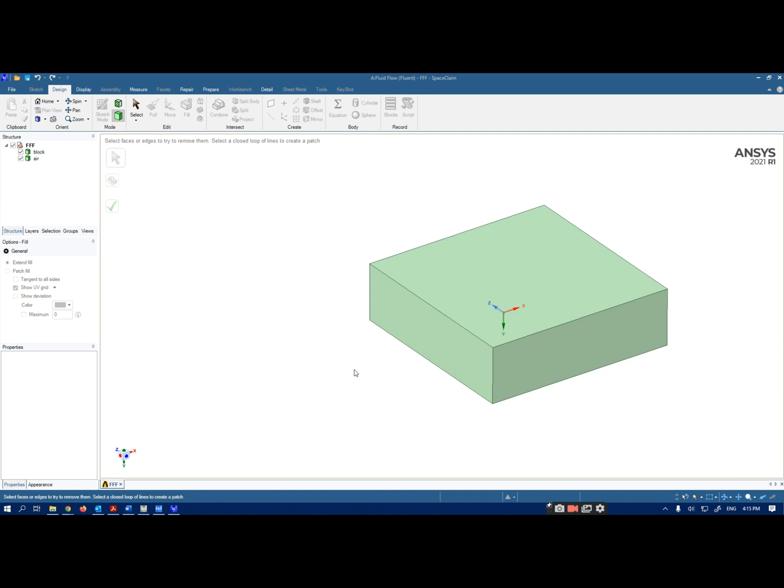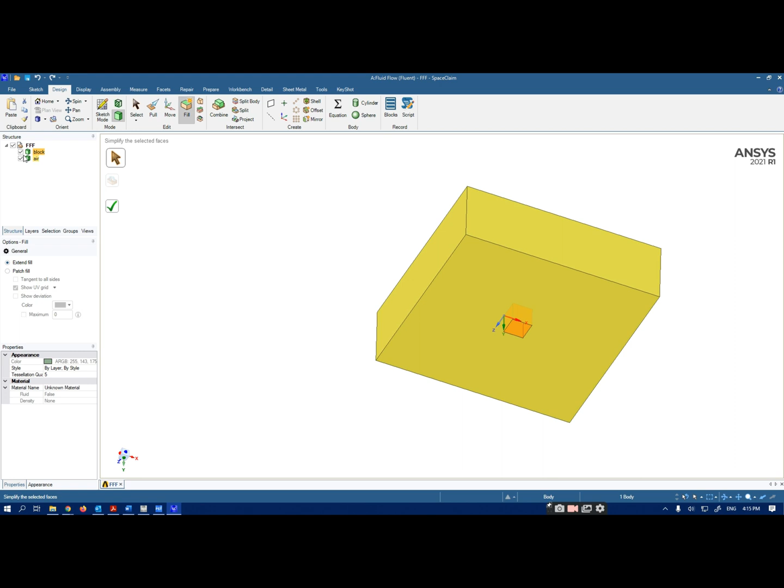For this simulation, because it's just a showcase, I drew this larger box, which is going to be our air domain, and a small block, this cube inside that, is going to be our cube inside this air domain. It is going to simulate something like a flow inside an internal channel. So if I remove my block, you're going to see we have that sharing contact between the air and block. So everything is good, no problem.

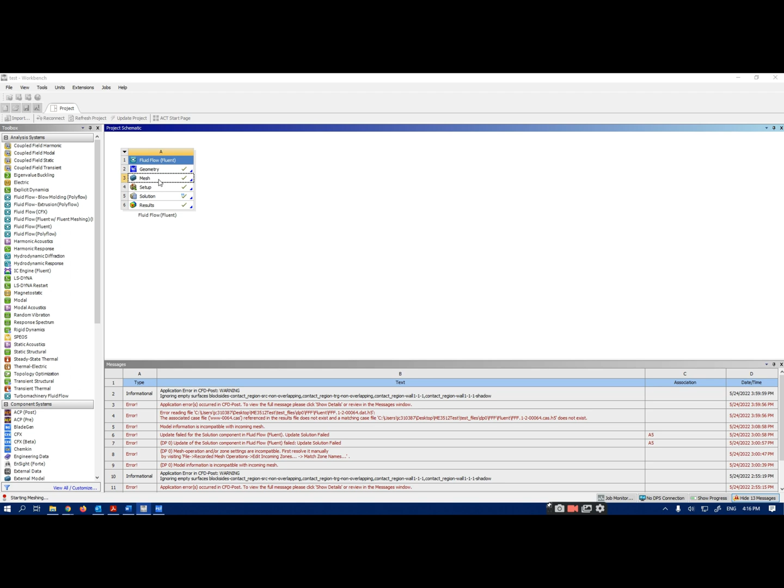Let me show you a few details of what I've done, so it will be useful later. Okay, let's go back to our mesh. Let me show you the namings we have so we can have a better understanding of the geometry.

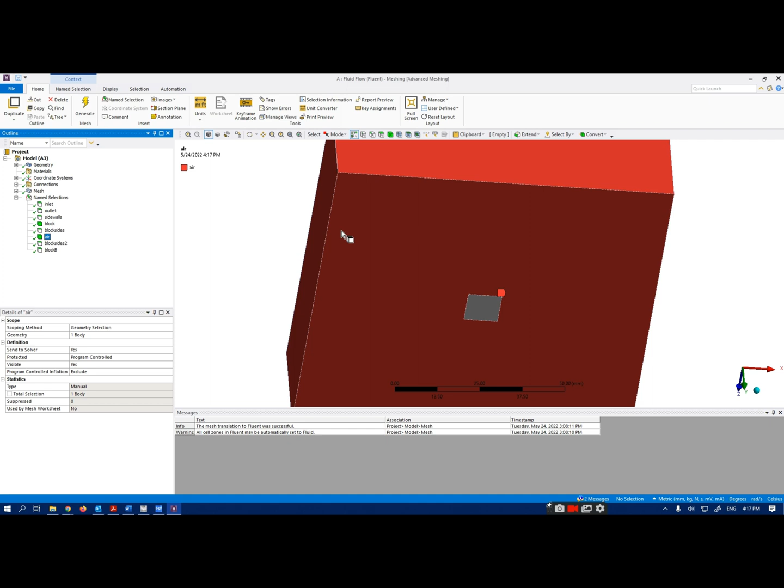Okay, I named this side as an inlet, the other side outlet. These three and the lower part are going to be our walls, the side walls, so nothing important is going to happen there. And I named the block there, air there, and the bottom surface of the block as block B, to assign some temperature if I want later, and the contact between block and air, I put the name.

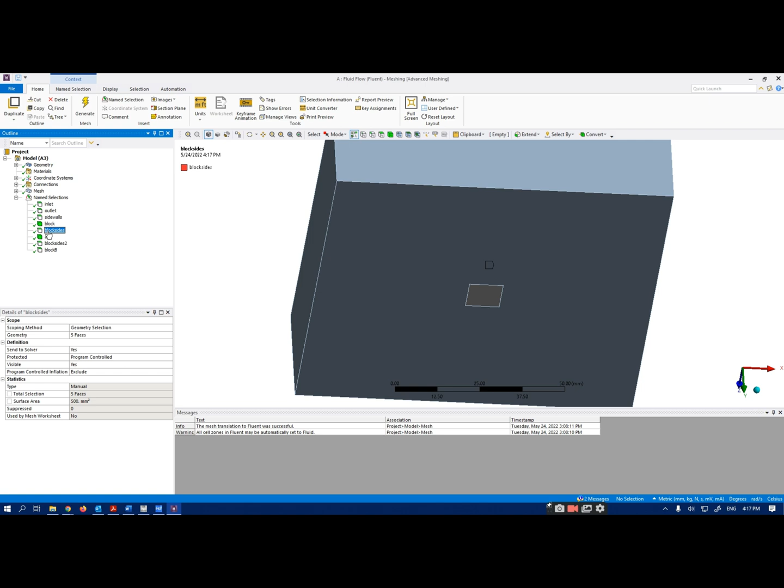One of them from the air side, I made it block side 2. From the block side, it's block side. Let me, for example, hide the block so you can see what I mean. This is the surface I selected because it is going to be the surface of the block inside that air. So later, if I need any information about that, I already named it.

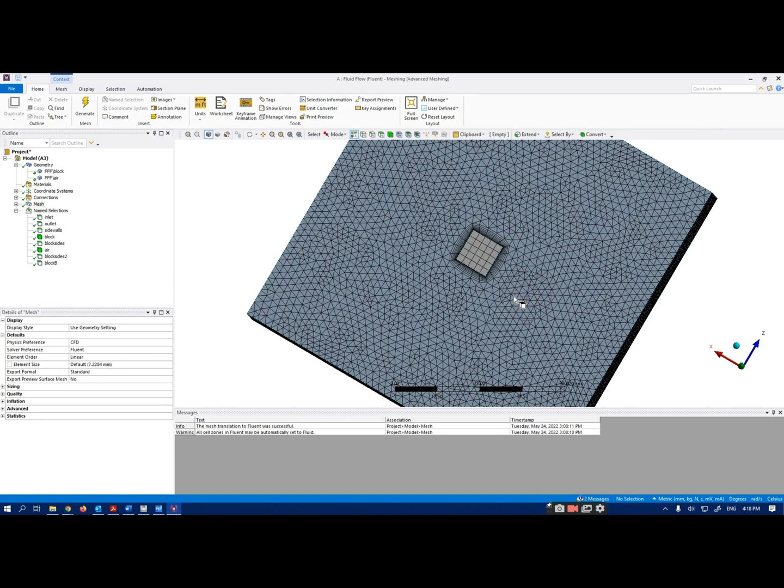Okay, so I put just a general mesh. As you can see here, I have some inflation around the block because close to the wall we usually need more information. This is a rough mesh, I didn't go for high quality mesh. This is just the showcase, but I wanted to show you whenever there is a wall and it is important for me, I need to have inflation.

Okay good, now let's go and I assigned, okay let me open this. I assigned air for the fluid and aluminum for the block. So very simple materials, basically those are the default materials for ANSYS Fluent.

Okay, almost there. So you can see it's pressure-based, transient. I included gravity, but of course gravity is not that much important. The model I considered is SST K-omega, because I decided to go with a velocity of, I don't know, 10 or 15 meters per second, so probably it would be turbulent flow inside this channel. Energy is on because I want to have temperature effect. Fluid is air and solid is going to be aluminum.

Cell condition for the air part is fluid and it's air. For the block part it's solid and it is aluminum. Boundary conditions, you can see inlet is inlet, so I already named them, so it is easy to check. So it is 10 meters per second for the inlet and the temperature is 25. And outlet is pressure outlet.

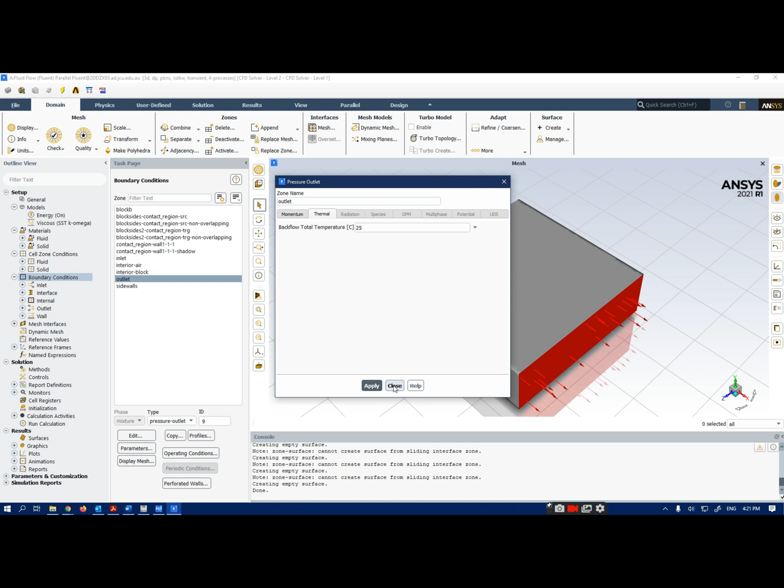As you know, the pressure outlet is the easiest boundary condition. Basically you make the pressure outside 0, gauge pressure would be 0, and again the temperature is going to be 25. So many students usually forget about this, and then you can see in their simulation they have hot fluid coming from outside, which is because they haven't assigned the initial or room temperature when they are assigning their boundary conditions. Anyway, and for the side walls it's wall.

Then you need to make sure your interface is okay. You go to the contact region, edit, and when you select this, you should couple the walls, the contact between the block inside and the air around it. We must have thermally coupled walls to be able to have heat transfer from the block to the air and have that cooling effect happening there.

And nothing else, I kept everything as default. The method is this, nothing changed here.

And I saved some data, as you can see here. Let me show you from the top: pressure, velocity XYZ, and temperature, wall temperature, Y plus, and kinetic energy, density, dissipation, turbulent intensity, wall Y plus in case I need it, wall shear stress, and surface heat transfer coefficient. If I want to calculate the Nusselt number, I need to know what is H at the surface.

So this is good, handy. You can have total surface heat flux, skin friction in case you need it for other calculations, and you can have heat transfer coefficient with different formulas, for example if you're using wall function, you can have wall function heat transfer coefficient. You can also have surface Nusselt number.

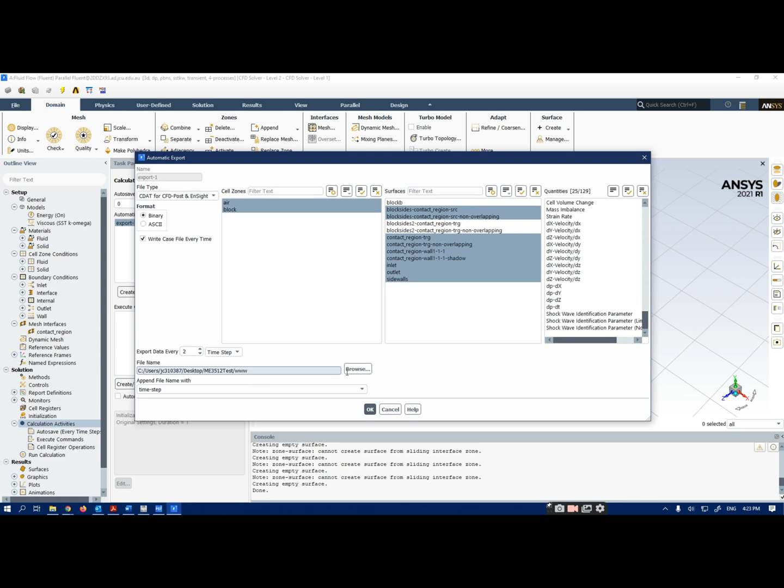So I included a few data, and for every 2 time steps, they're going to be saved on my desktop. Let me check - I initialized and patched it, and I put high temperature as the initial temperature for the block, gradually cooling it down. It was like 250 degrees, something like that.

And then I decided to go with this time step. Usually you need to check your CFL number to make sure this time step in relation to your mesh size is a proper number, and run for a few time steps to get a few seconds of data.

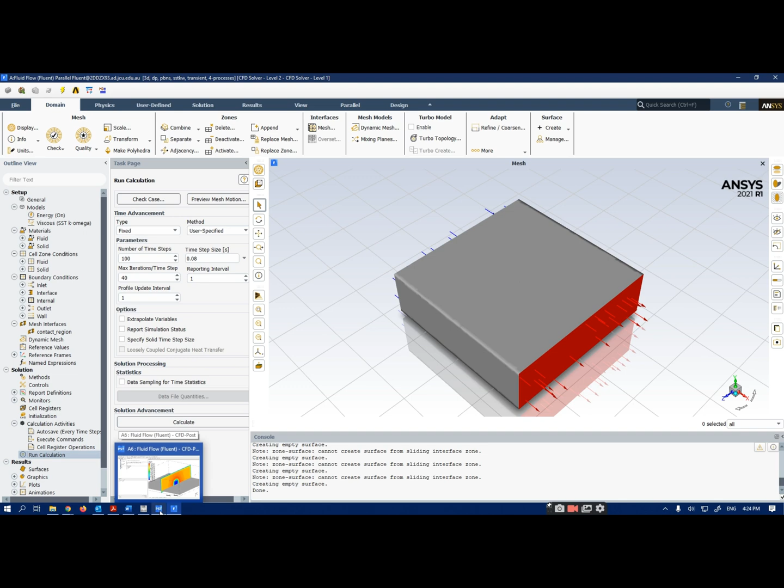So after finishing the simulation, I got these results. Let me go back to the contour.

Let's show you plane 1 velocity, for example. I can close this - so this is my air domain. As you can see, it's the air domain, and the block is here. We have inlet from the left and outlet here, and we have nice flow around the block. As you can see, it's going to the left, to the right - it's going to kind of flap a little bit at this Reynolds number, whatever the Reynolds number is.

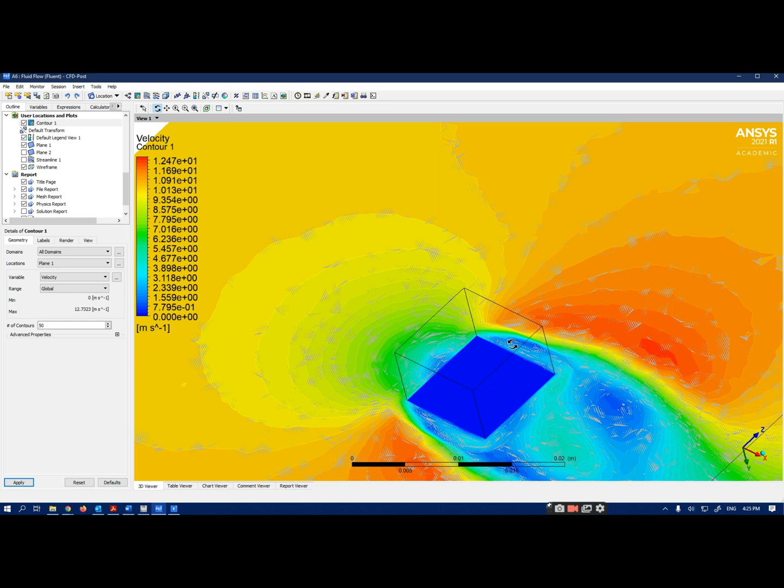Interestingly, close to the sidewalls, because we have a no-slip condition, you can see the velocity is blue, which shows zero velocity. So it is working close to the block. Also, we have lower velocities, but because of the high velocity, the boundary layer is smaller, and you can see the wakes behind and circulation or turbulence behind this block, which shows the type of flow we have. Okay, so this is the velocity.

You can see I drew this plane number 1. You can draw any other plane or line anywhere you want to get information about that. But these are qualitative data - you may need quantitative data. Let me show you, for example, plane 2.

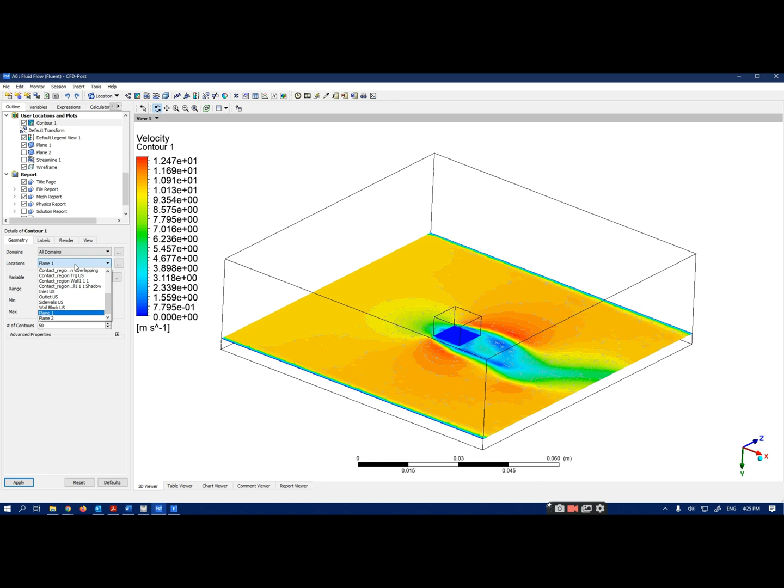If I use this, show plane 2, you're going to have velocity over plane 2, which is vertical. I wanted to see what is going to happen at this perspective, and you can see this - okay, I should have selected the other way. Anyway, this is our block, with low velocity around it, and gradual velocity increase and then decrease.

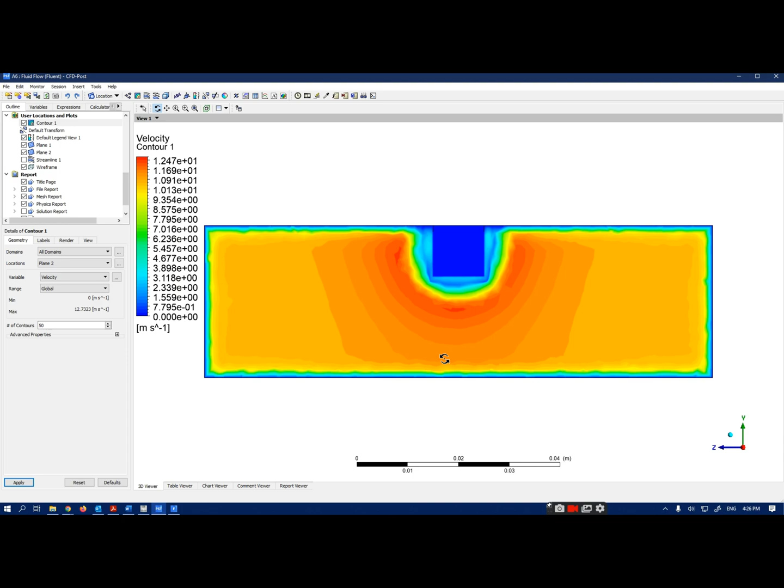Okay, so the main purpose of this video is not about the simulation. You're familiar with this type of simulation, it's very easy for you. Let's go to expressions here.

Let me increase the size. So we have variables and expressions, which are very useful. I defined a few expressions already here to show you how it works, but of course I'm going to show you the details of how we can define expressions.

For example, the first one I wanted to know is Reynolds number. So let's double click the Reynolds number. So here it says 1.225 kilogram per meter cube, so it's the density. I manually typed this with the unit times 0.0461 meter, which is our characteristic length. How did I find this for this channel?

Basically, I found the hydraulic diameter and selected that hydraulic diameter as my characteristic length. So it is 30 by 100. 4 times cross-sectional area divided by perimeter is going to be the hydraulic diameter. So it is going to be 4 times 30 times 100 divided by 130 times 2. That's it - it's going to be 0.0461, times velocity.

But I may have different velocities here, so the best choice would be the average velocity. So I said area average for velocity - which side? I just want x velocity because I already defined only x velocity here as an inlet, at sign inlet. Inlet is the name I already defined in my simulation when I was defining my mesh.

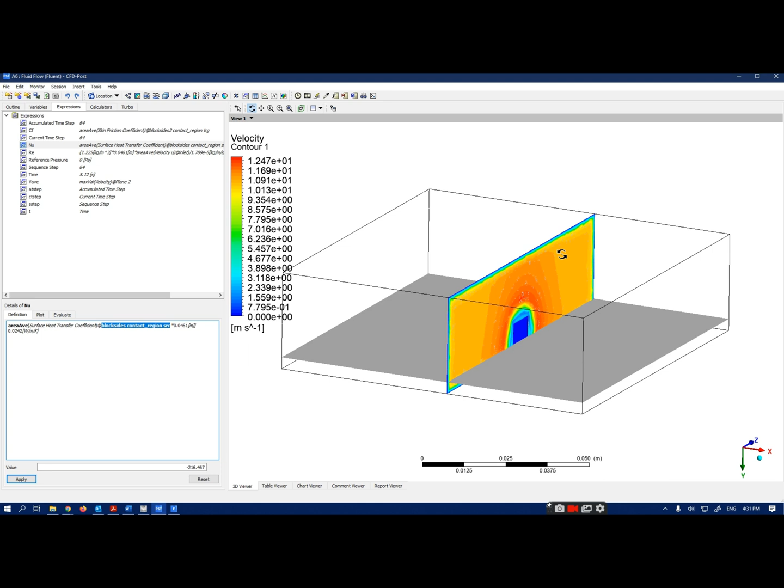Okay, for this plane, which we call plane 2 here, let me turn it up. So this plane, I want to see what is the maximum velocity over this plane.

So I go to expression and I define another expression which says maximum value of velocity, one of the data I extracted already at plane 2. The system is going to check all the velocities here and give me the maximum velocity of 12.6. From here you can see it should be 12 point something, so it's fine. Let me go back and make this.

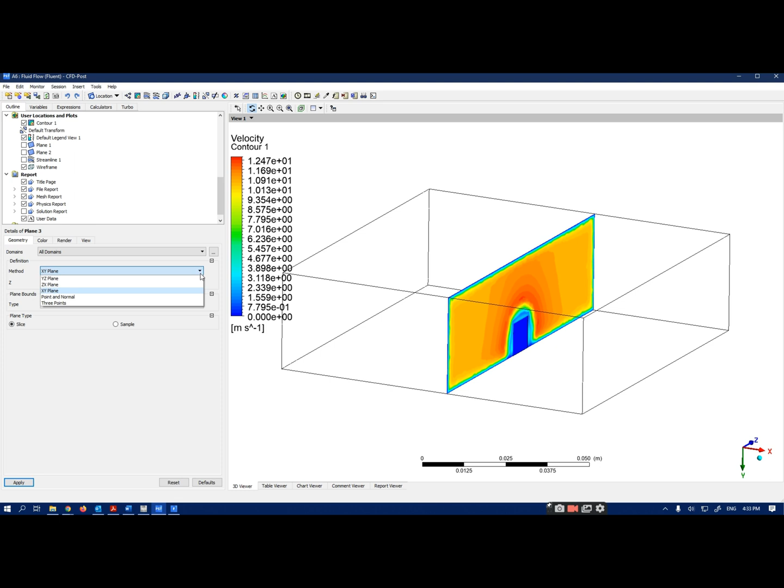Okay, let me draw another plane, this time plane number 3. Let's turn off this, and it's going to be similar to plane number 2, but at the other end of the block, so it's going to be at ZY. Let's see, let's make it a bit closer to the block. So now I have another plane on the other side, and I want to get the average velocity at this part. The plane name was plane number 3.

I'm going to define an expression, right click over expression, new, and call it velocity average 2, since I already had one. I want to find a value, it can be maximum, minimum, or average. Minimum is always 0 for velocity, so I don't care much about that. So I'm going to select functions from CFD post, and there are so many functions available: area average, integrate over area, count, normal force, length average, and more. I can select minimum value, maximum value, sum of some stuff, if you have a variable you want to add up.

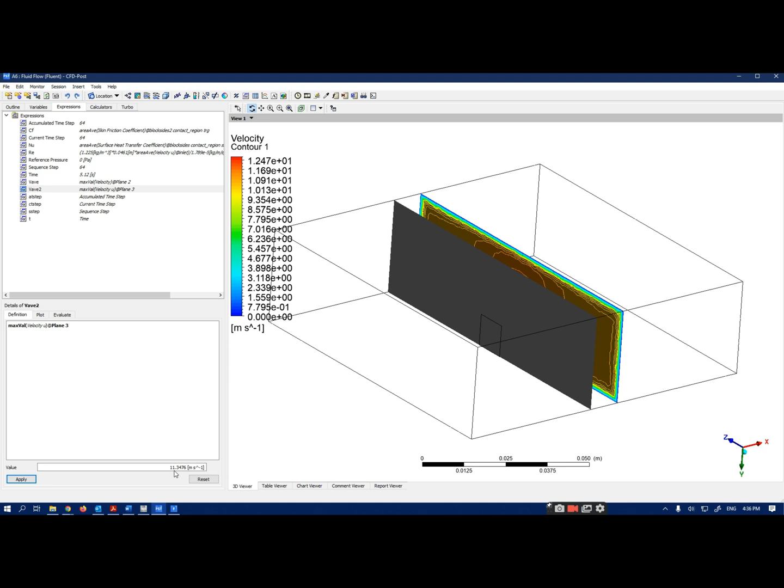So let's go for maximum value of one of the variables I already asked for. That's why when doing a simulation, try to include as many variables as possible, because later you may need something and it would be difficult. So this time I select x direction velocity, velocity u, at this surface, so location plane 3. You can select any of these locations, some coming from the naming you did when defining your mesh. You can also divide by some number to make it dimensionless, but for now it's okay. Apply, and you can see the maximum x velocity is 11.34 meters per second at plane 3.